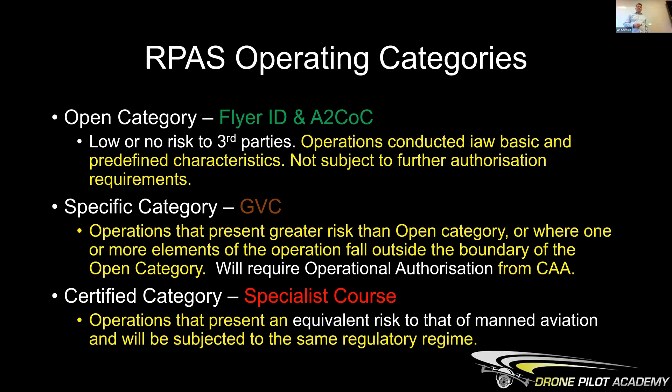So we're just going to look at the first two, the open category and the specific category. With the open and specific categories, there are 3 main factors. The maximum weight of the drone is 25 kilograms. That is some beast, you know, that's a bag of cement, isn't it? 25 kilograms. You can imagine the damage it would do if it hit you. That one there, as I said, is 9 kilograms. So you can see the difference in size.

You've always got to be able to see your drone, so they call it VLOS, visual line of sight. You've always got to keep it in sight. The little drones being handed out, even though the maximum is 500 meters, I dare say you won't see those beyond 100 meters. So you've got to keep it in visual line of sight at all times. The Matrice, you probably would see that. The eBee, the fixed wing, you'd probably see out to 500 meters. And you've got to fly no higher than 400 feet from the surface.

There's a reason you go up to 400 feet and stay there: most crewed aviation will fly down to 500 feet unless they're taking off and landing. So as you can see, you're up to 400, they're down to 500, and you've got a 100 foot safety buffer.

Around airports, there are regulations that you can't fly within airport cylinders. So there's a zone, 2 or 2.5 nautical miles, and the approach lanes into the airfields as well. It's illegal to fly there unless you get permission.

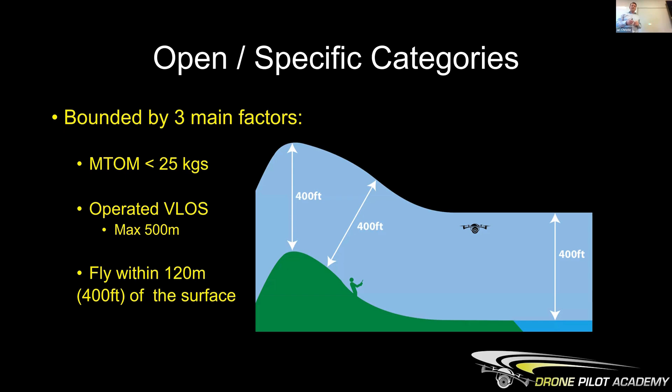You are supposed to keep visual line of sight with your drone at all times. If you want to go heads-in, let's say there's a shot you really want to take, a cinematic shot, and you want to go heads-in, you're supposed to have somebody at the side of you.

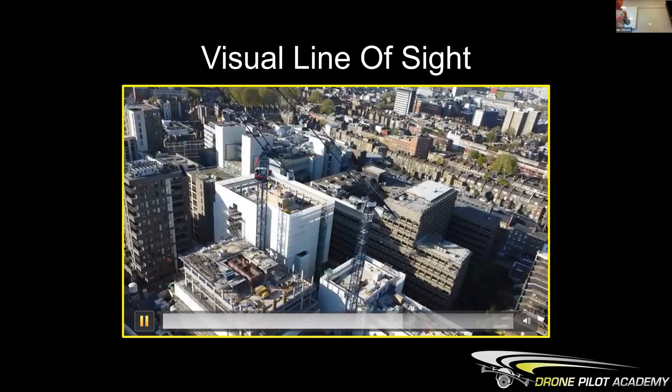This is probably what this guy was wishing he had in hindsight. He's in London, he's got something the size of the Mini 4. His observer could have told him, by the way, that the crane operator is now in the crane and he's swinging it round towards you. So move your drone, descend it, increase height.

Hindsight is a beautiful thing, isn't it?

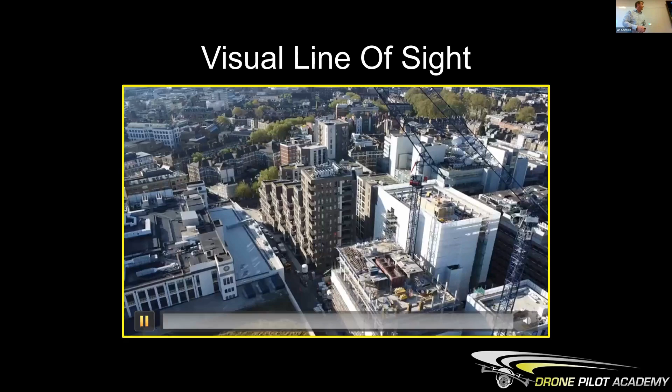There we go. So as I said before, the CAA, what they're worried about is the risk of injury to uninvolved people. They have a duty of care, and within aviation there's a law that applies to everybody: a person must not recklessly or negligently cause or permit an aircraft to endanger persons or property.

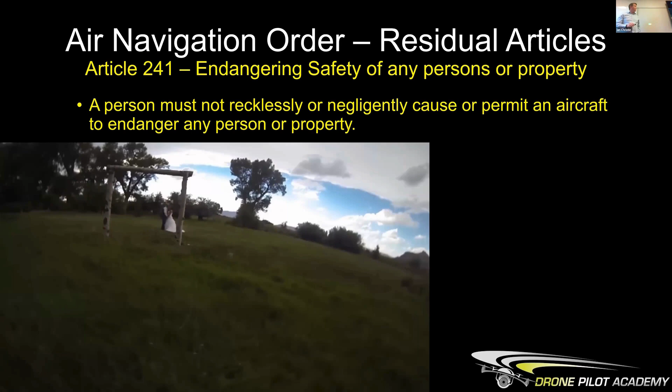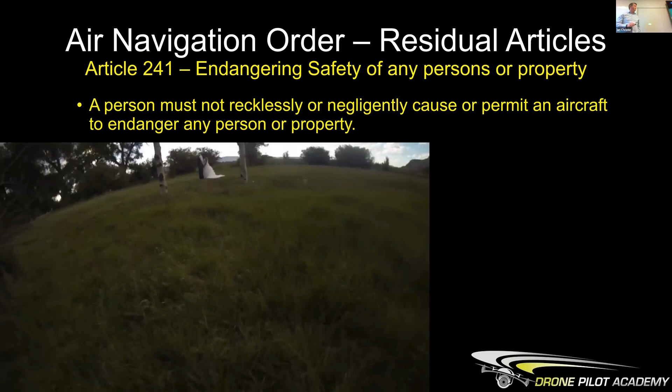Oh yeah, we teach how not to do that on the courses.

So basically, the open category - low or no risk to third parties. Effectively, the risk is based on the weight of the drone and how close you can get to people. In the open category, they divided it down into subcategories called A1, A2, and A3. So what they were saying is, if you've got a really lightweight drone, like the one we've just seen being handed around, then you can fly over people.

So you walking down the street - we'll come back to this when we talk about people, rogue operators around quarries - but they can fly over the top of people, not assemblies of people, but people. The A2 category lets the drones go a bit heavier, but now they're not going to let you fly over people's heads. They're going to give you criteria, distance limits, how close you can get to people. So we call that the near or close category.

And then if you want to fly something really heavy, they're going to say, right, let's get you away from congested areas, built up areas, let's get you way out of the way. This is where you go to farmland, highlands, 150 meters away. And then you can fly all the way up to 25 kilograms. If it falls out of the sky, it doesn't matter that it's really heavy - like I said with the wind farm analogy, it shouldn't land on you, therefore there shouldn't be any risk with that one.

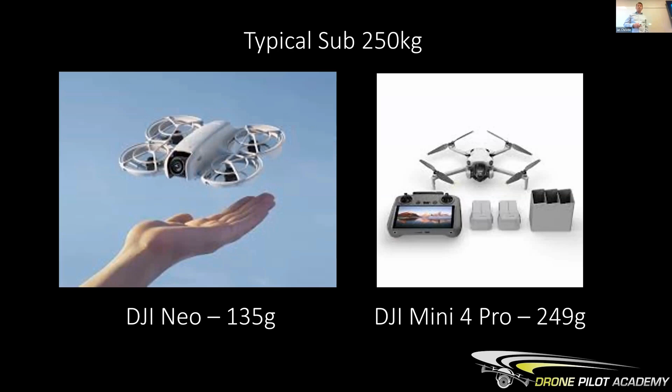So just for those online, we're talking about little Neo, it's palm size, we're just handing that out. You've got the Mini 4 Pro and it's below 250 grams. That's important when we talk about regulations.

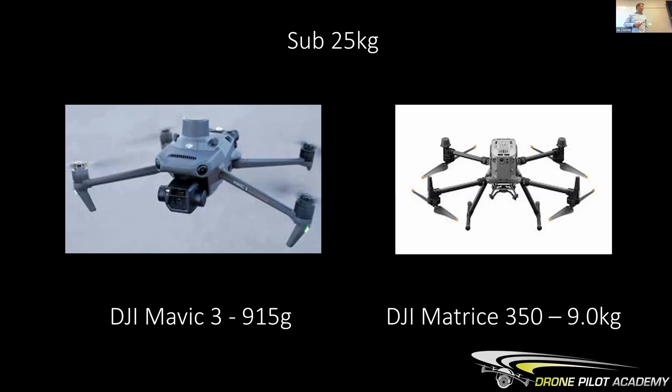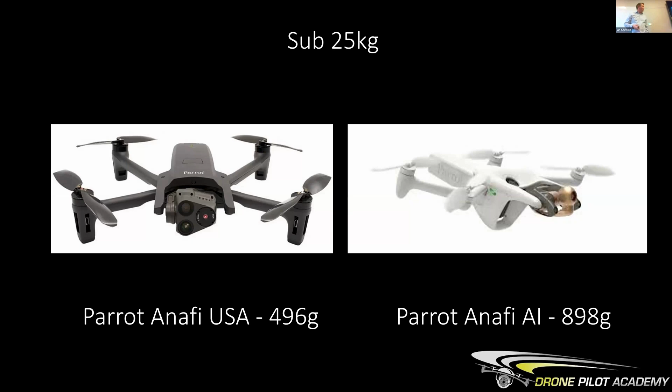If you're on any specific projects, Ministry of Defence projects, then we're not a big fan of Chinese drones flying around their sites. So you've got the French options here, thermal camera on the left and survey grade around.

This is a newer version, it weighs a bit more, but effectively that's the one I was telling you about that I bought. It sat in the box for 6 months. So it's very worrying when you first take that off because you shake it to start it - that is the start sequence. It's got a tilt switch. You tip it up and run and throw it, and then you just hope it stays on your pre-programmed flight path and doesn't just bugger off in a different direction and you say goodbye to it.

The vertical takeoff one, the Wingtra on the right - I know a few operators have got this within the quarry sector. It goes up and then it tilts and goes forward because it's more efficient when it's got the lift from the wings as well in forward flight.

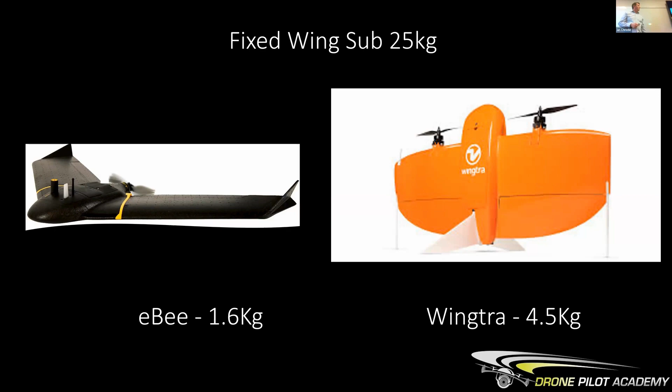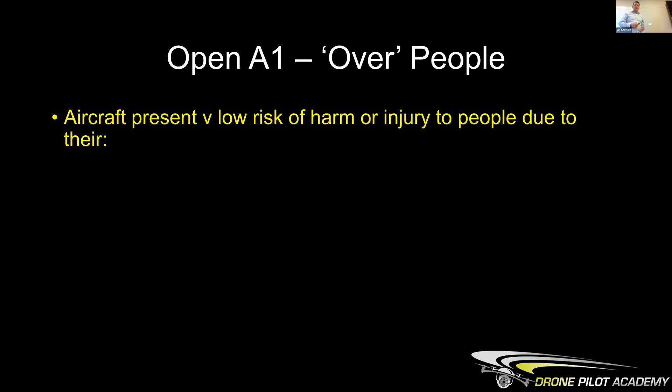So going back to the flyer ID. We've gone into the bar, spent 10 minutes getting your flyer ID, you walk out of there - what can you do? Well, you can operate in the A1 Open Category and the A3 FAR. The A1 means you can go out and buy a Neo or a Mini and fly that as long as it's in a legal area, not an airport or a prison or anything like that. You could fly it outside in the university grounds, as long as you're not flying over groups of people. That's all you need if it's sport and recreational - that is it.

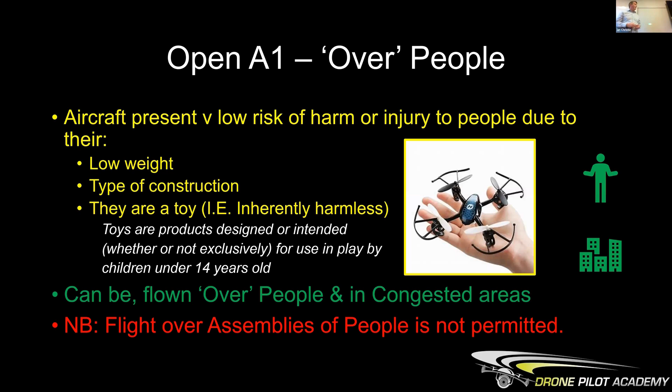So, fly over people and in congested areas - people on social media love this drone. Roofing companies love it. There's no more scaffolding, no more ladders at the initial inspection stage. They just fire up these drones, have a quick look, and can prove to the client where they think the issue is. They may need the ladders and scaffolding after that, but it's so much better in terms of risk.

The A3 - we skip A2 deliberately - also means that once you've done your 10 minutes in the bar and got your flyer ID, you can go out with the Matrice or anything up to 25 kilograms, and fly that in an open area, doing commercial work with it as well. But you must be 150 meters away from a congested area. Our people in Norfolk, some companies said they could do pipeline inspections with that drone, and I said that's all well and true, but you can't cross roads really, you can't go near any buildings, and if there are any people around you must stay at least 50 meters away. There's also the 1-in-1 rule - most people do mapping flights at about 70, 80 meters, and whatever height you're at, you need to be the same distance away. So it's not that easy to fly, but you could go and have fun with anything up to 25 kilograms.

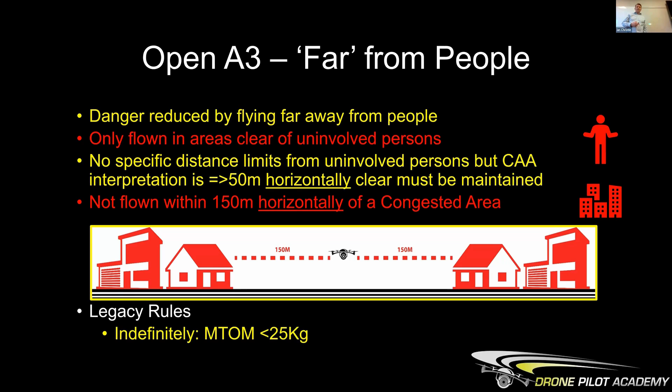So the one in the middle is the A2 - that's the one where you can fly near to people. You can't overfly people, and there's a 50-meter horizontal buffer from uninvolved people, always horizontal. So if you get airborne and need to move 10 meters to the right, you've got to make sure you've got 50 meters clearance at all times. That's quite difficult when operating in congested areas with that horizontal distance. This is a horizontal distance from uninvolved people - in your quarry, you can get people involved by giving them a safety brief and getting them to agree to fly around the drone. So an A2 does work in a quarry.

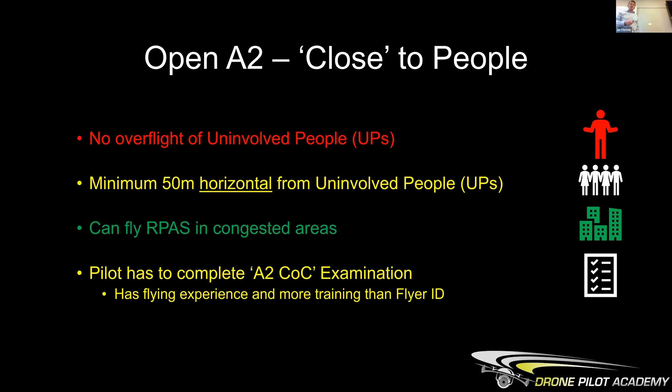It doesn't work for surveyors in town centres. You'd really struggle to do anything valuable with that drone around this university campus, because imagine half a 100-metre sprint track in both directions - it's very difficult to do anything tangible. And you've got to follow the 1-in-1 rule as well, so if you wanted a shot at 70 metres, you'd need to be 70 metres away too. It can be quite difficult. Max weight for that one is 2 kilograms, and there are quite a few drones below the 2 kilogram weight limit in the industry - most of them are.

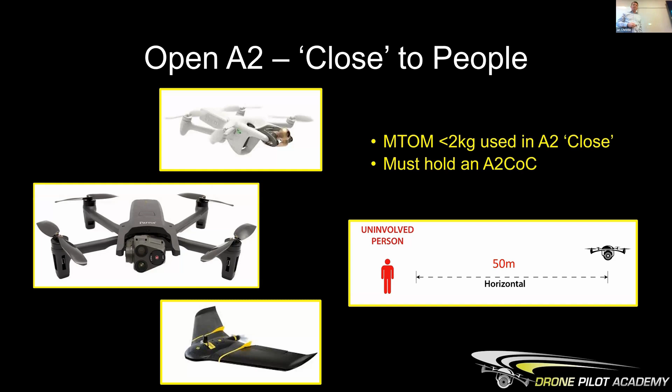That's just a diagram showing the 1:1 rule - whatever distance you are, you need to be at whatever height you're at, you need to be the same distance, 50 meters.

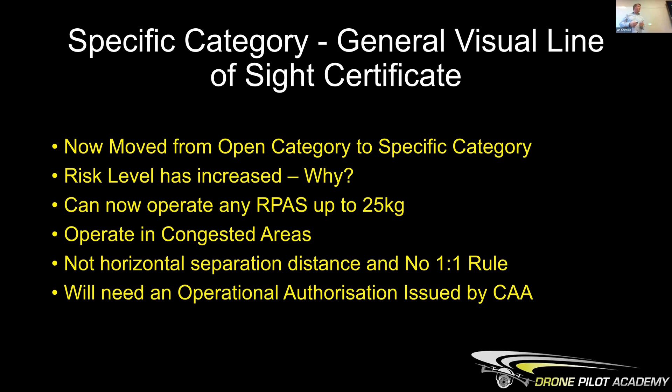So what if you do want to fly that Matrice 350 around this campus? Well, you can do it, but the risk level now has gone outside the open category, so you jump into the specific category and need the general visual line of sight certificate - that qualification many of you got through the 3-day course in Motherwell. Why do people go to that? Because the risk has increased - you can't fly a 25 kilogram drone in a congested area, remember you've got to be 150 meters away. So now with the qualification, I can fly that drone on this campus. The only criteria is when I take off and land, I've got to have a 30-meter safety buffer from uninvolved people, so we'd have to move all the students out and put a cordon round us. But once I'm airborne, it's a 50-meter separation distance - people refer to it as a bubble around the drone. So if you go to 52 meters, you're almost guaranteed to have that 50-meter clearance from people.

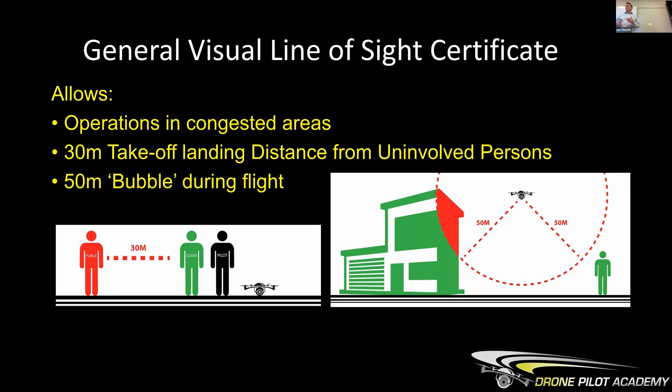Now, just because you can fly over people doesn't mean to say you should, and your risk assessment method statement should do everything to try and avoid people - time of day, flight path, etc. If you don't need a heavy drone, use one that's a bit lighter.

So, which is a better license? Well, the GVC gives you more freedom. Notwithstanding the A2, if you get people involved, then you could use that in a quarry environment as long as people around you are involved.

Max 2 kilograms, so all the mainstream drones, the Mavics, the Mini. The Mavic, sorry, is the one to the right, the smaller one to the right of the big beast there.

So, in terms of drone use in quarries then, one aspect you may not have thought about is thermal surveys. This one was Justin Collis from Heidelberg Hansons, and they're using that for their carbon targets for 2030 and 2050. They were doing some analysis.

You can look at conveyor belts and bearings, hot wheels and things like that, particularly. So it does show a difference. There's one of the dryers you can see there, and they can do spot checks on the temperature. So what they were saying there was the insulated end was 40 degrees, but the uninsulated end was 176.

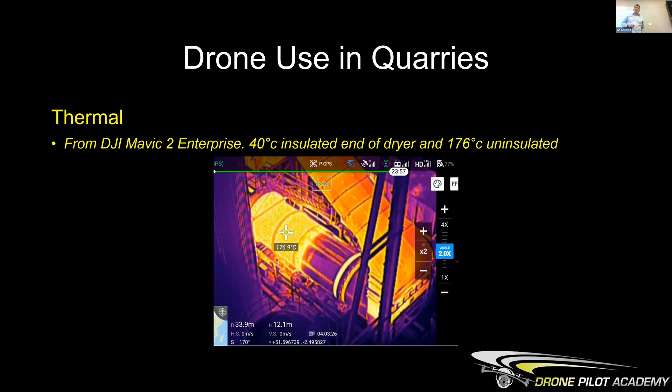So it seems, also, if you've got security on your quarries and you've got a perimeter, a thermal drone at night would do that, or in the day just use a colour sensor. The guys that use them for explosives, as we know, many of our customers use them for profiling.

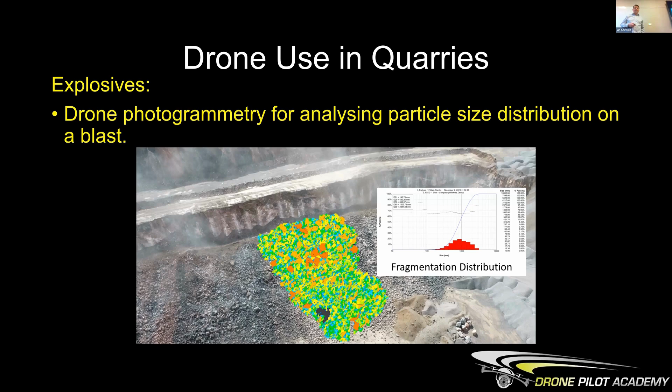So on this particular photo, they use photogrammetry to analyse the particle size distribution on a blast. And then also they can create digital twins - look at the models there, check the accuracy of the design - and also by using drones, it removes the person as well.

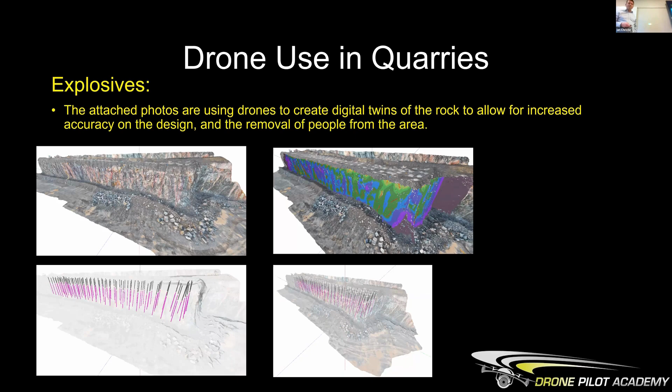So it's much safer. The big one though is volumetrics. For your stockpiles, looking at a quarry one month to the next, what's been removed - the software now can tell you what the difference is. There's always AI out there to do that.

But then what sensor would you use? Because on that Matrice, that's got a camera on it which will take colour images, but you can put different payloads on there - you put thermal. I'll just start with option two: photogrammetry, so it takes loads of pictures, stitches them together, and you get your 3D model, amongst other things.

We'll talk about the deliverables. But generally, they're quite cost effective, because the Mavic 3 Enterprise that you guys are using with the correction service is about £3,500. When you think back to my £800 a day I was charging plus travel or whatever, it doesn't take long to pull that back.

And that's why we see a lot of drone operators bringing the drone service in-house. An example, Croxden Quarry there, it's 245,000 square meters.

It normally takes about 30 minutes to set the drone up, and 15 minutes to set the mission, and it took 30 minutes to fly that. Imagine doing that in a traditional method - it would take so much longer, and you only get a spot where you put your theodolite down or whatever it might be. So it's the safety aspects of it as well.

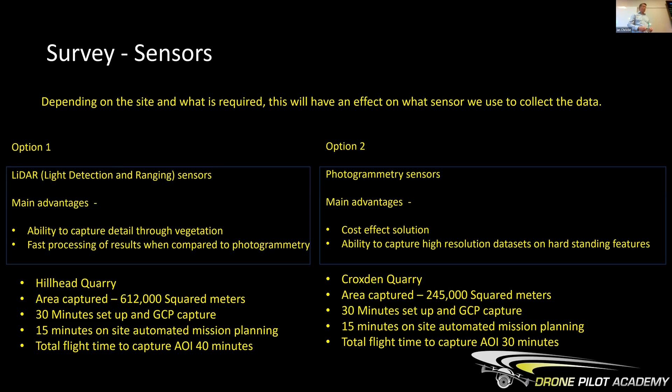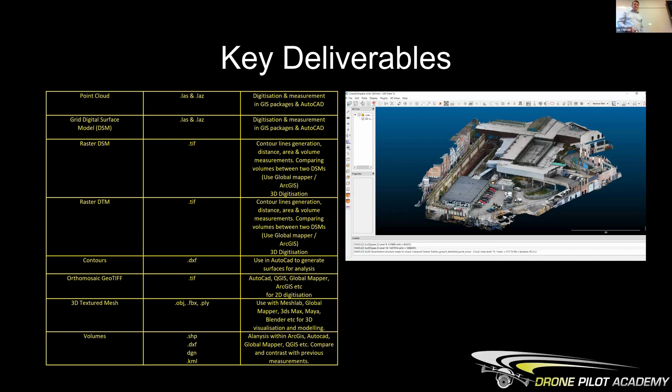You get your surface models and your terrain models. You get your contours on it, popular for the house builders. They've all invested in it - 10 years ago they didn't, when I bought that drone, but now they're all using drones to do the cut and fill, the volumes, work out the planning, putting the houses on, getting the optimum amount of houses for the return.

Orthomosaic, so that's just like all the pictures stitched together. Great for health and safety, so you can put, when you go onto a site, the big plan on the wall - that's where your fire evacuation area is, these are your safety lanes, one-way systems, and what have you. So you don't need to employ somebody in an aircraft that has to get a nice bright blue sunny day so they can get a huge picture at high level. You can just stitch all the pictures together to make one picture.

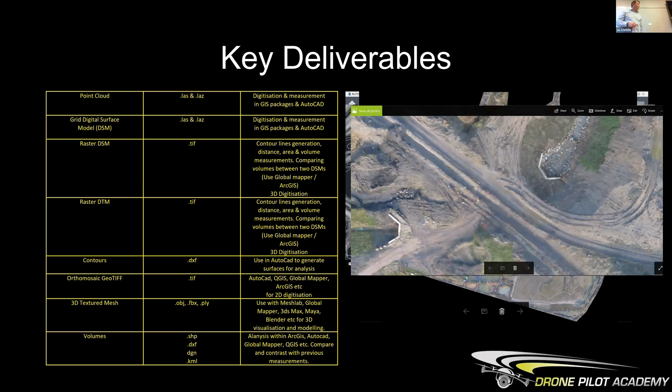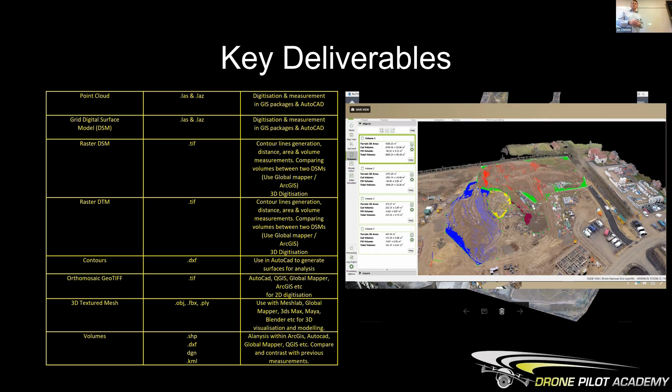And those out there know about 3D textured mesh. And then the really important one is the volumes. So you can dot round a stockpile, classify what it is, put the cost associated with that classification, and it will give the value of the stockpile so the accountants know what's on site. So really useful - that's the drone use in quarries.

In terms of the QNJAC guidance then, there's some great guidance online. A lot of the mainstream quarries and the drone operators are involved in writing this guidance. We got asked to proof it as well. So there's some good guidance on their website.

You can download those. I think it was because the incidence of rogue drone flights over quarries was quite worrying, and I get it - it falls out of the sky, hits an operator, or somebody's doing a drone survey and hits the drone. Could be the matrice, I know some of the operators have got those. And what do you do about it?

Well, there's one particular guy out there called DJ Audits. He goes to police stations, he will argue the law with police. They'll try and stop him using his drone, but he knows the law inside out.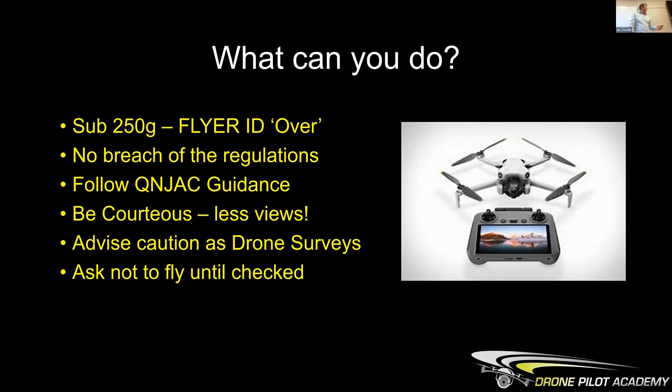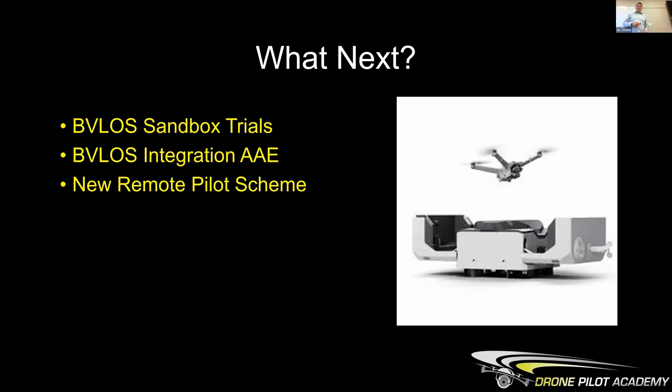Right, I think I've covered everything. So, have we got any questions at all?

Just interested in the chap who turned up at St Barnabas Quarry - you're saying that under the law, he doesn't need permission to fly over an active quarry, is that the case? Yeah, correct. Sadly, and some of his videos, he turns up to police stations and flies over them, and they try to stop him, but he knows the law and says he's not breaking it - he asks, well, which article am I breaking? There are privacy regulations out there, but if you're not seeing people's faces, and you're in a public area, it could be deemed that it's expected your face may be captured and put on social media.

So it makes me wonder about rival quarrying operators flying drones over each other's quarries - could see anything commercially sensitive. If he flies over a quarry, gets pictures commercially sensitive to that operator, and posts it online, then what's the legal challenge there? I don't think he's got one. Do you remember Leeds United was sending a drone to rival teams and watching the training? Yeah, morally it's not good, is it? But legally...